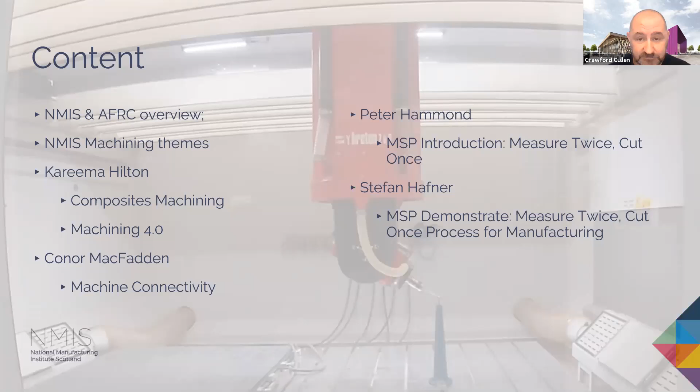So the content today: I'll give a brief overview of NMIS and AFRC, and then the two NMIS employees will talk about the machining themes currently being developed at NMIS. Kareema will talk about composite machining and machining 4.0, and Conor will talk about machine connectivity. Peter Hammond will then do an MSP introduction, and this chat will be about measure twice, cut once. Then Stefan will do a demonstration of MSP and the software available. This is software that's widely used at NMIS.

So what is the National Manufacturing Institute Scotland? The National Manufacturing Institute is a group of industry-led manufacturing, research and development facilities where research, industry and the public sector work together to transform skills, productivity and innovation, to attract investment and make Scotland a global leader.

NMIS will increase productivity by reducing barriers to innovation, stimulate investment and increase manufacturing competitiveness, catalyse job creation and strengthen supply chain links, and inspire and attract talent, equipping current and future workforces with the skills they and businesses need. They'll work with manufacturing businesses of all sizes in multiple sectors, providing benefits across the whole of Scotland.

So NMIS is operated by the University of Strathclyde, but supported by the Scottish Government, Scottish Enterprise, Highlands and Islands Enterprise, Catapult UK, Skills Development Scotland, Renfrewshire Council and Scottish Funding Council. The NMIS Group, as you know, AFRC and LMC are already well-established centres.

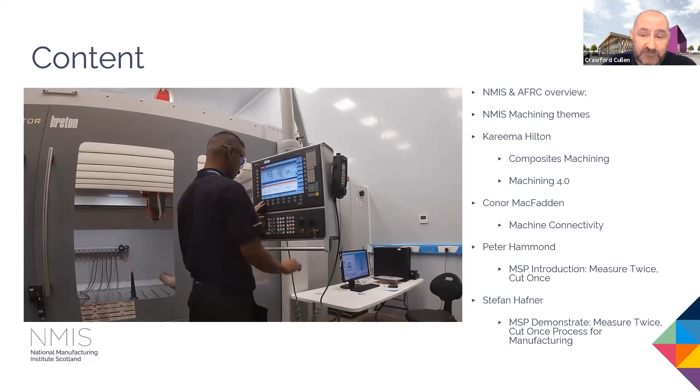Then with a high value component such as a casting or a forging, maybe with a lead time of 12 to 14 months, MSP then tells us: can we make that part from that forging or that billet that is supplied? Once this has been done, MSP can then carry on and continue to inspect the part. Does the part conform, or do we need to change or alter the program?

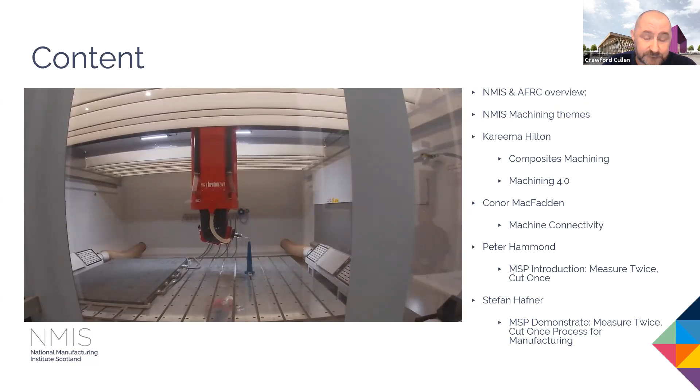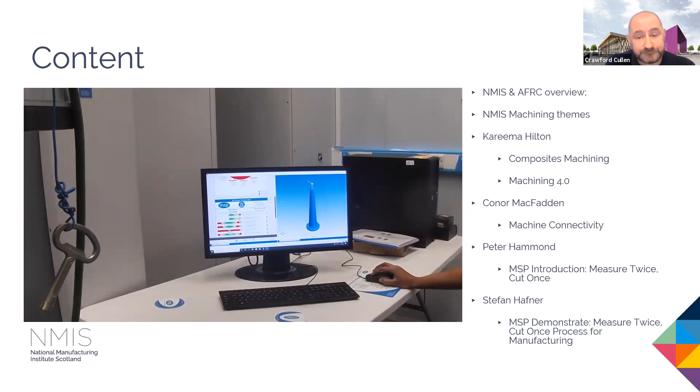So I felt that was the best place to start with a machining webinar. Hopefully these will continue and we'll touch on other subjects that may be important to you in your process or in your manufacturing. With that, I'd like to pass you on to Kareema Hilton. Thank you.

Thanks for that, Crawford. Okay, so I'm Kareema Hilton. I'm a manufacturing engineer at the NMIS team, and I am leading the Machining 4.0 project.

If you haven't heard of it, it's a European funded project and it's aimed to help SMEs around Northwest Europe. So we are aiming to transfer knowledge on innovative technologies to SMEs to make them more competitive with the rest of the world.

The project itself consists of 10 partners, and these partners are located in Germany, Switzerland, France, Belgium, Netherlands, Ireland, and ourselves in Scotland. So we're covering quite a lot of the Northwest Europe region. The aim of this is really to capture a lot of the small to medium-sized enterprises around these regions and try to make them more innovative.

There are three main deliverables of this project. One of them is to create technology sheets. So these are one-pagers that we have on the Machining 4.0 website. There's a link following in the next couple of slides that you can go to. These technology sheets are coming from all 10 partners, and it tells you about different technologies that these partners are experts in. Please feel free to have a look at these sheets.

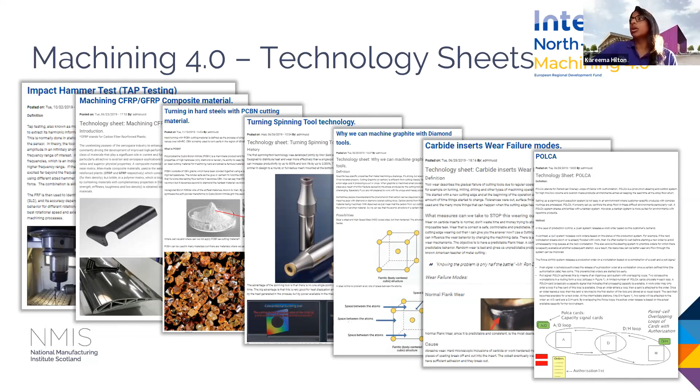Another deliverable of the project is the voucher system. So we have 50 vouchers that we can basically help 50 SMEs around the Northwest region. The value of the voucher is 12,000 euros of our time. So it's basically passing on our expertise, allowing SMEs to use our equipment and our technology areas, really just to show the SMEs the technologies that are out there and to prove to them that they're actually worthwhile, but without them having to spend money on it at this stage, they can test it out.

So to go about a voucher, I would say to get in touch with myself or any of the other partners, and we can discuss how we can go forward. And if we end up realizing that there's a means for the voucher, then please go onto the website and you can fill out a form.

The main criteria are you have to be an SME within the Northwest region. It would be great if you're willing to share about the project that we will work on together. We could share it to other organizations and put it on the website. And the content of the voucher should be in the field of machining or Industry 4.0. So we do request that the organizations are machining SMEs.

And the third deliverable of the project is application demonstrators. So all the partners have different demonstrator application areas. The AFRC ourselves, our demonstrator is on machining stresses. So this is an area that we've done a lot of research and development in the past few years at the AFRC NMIS team. We have different equipment. So we've got a DMU 125, which is where we are going to show off our demonstrator in this case. But in the team, we have a lot more other machines on site.

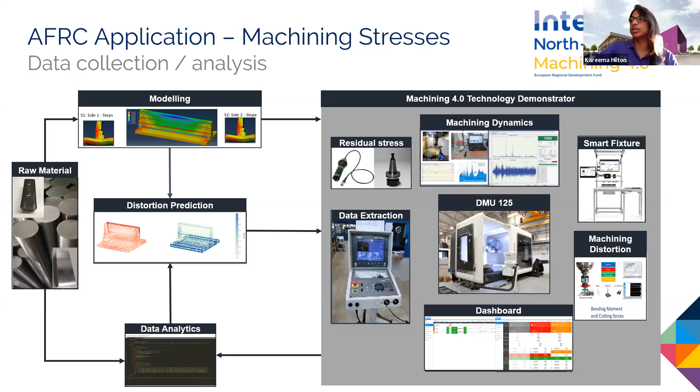We're proposing to use our tap test kit, use a smart fixture, use a sensory tool holder. And all these areas, we're hoping to extract data from these technologies and display them on a dashboard, which my colleague Conor will talk a bit more about later on. And we will extract data from these technology areas and try to analyze it and help the machining SMEs to understand what's happening when they're cutting parts in the future. If you have any more questions about this, please ask at the end in the question and answer, because I'm more than happy to supply information.

Another area of our application is composites machining. So we recently brought in a Breton Raptor. It's dedicated to machining lightweight parts. We've installed our MSP software on it, which Stefan and Peter are going to talk about further. This is allowing the machine tool to be able to locate datums on complex parts a lot easier than traditional methods. And this will help us to machine lightweight parts as close to drawing as possible. So the Breton Raptor is a 5-axis high-speed milling machine. So it's good for machining composites parts, but also aluminium parts as well.

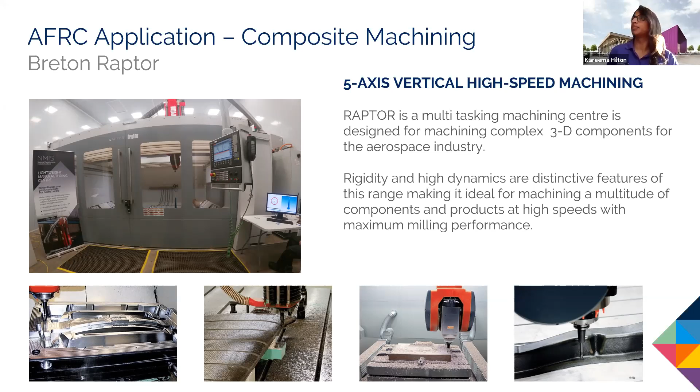So now I'm going to pass you on to my colleague, Conor, who's going to talk more about connectivity and dashboards. Thank you. Thanks, Kareema. So I'm going to talk to you today a little bit about machine connectivity. Can you click onto the first slide?

Thanks. So if you've heard about machine connectivity, you've probably heard of things like the industrial Internet of Things or big data or machine learning. Maybe you've even gotten to the point of some of the communication standards like OPC UA and UMATI and Modbus. But for those of us that aren't computing science engineers or don't have a computing science degree, what does this actually mean? It wouldn't really be fair to call these buzzwords because they do all mean something, although they can feel like that in some senses.

So if you're just getting started with machine connectivity, it can all be really quite overwhelming. If you're looking for a complete smart factory setup, you do need to know what these things are. So I would recommend that you speak to our digital team who are doing some really good work in this area. But if you just want a bit more of a simple quick start overview, that's what I'm going to talk about now. So talking about if you're a smaller machine shop, how you would get started on machine data.

So the first question you always have to ask when you're starting to collect information is, what are you actually trying to achieve with your information? So based on that, we've come up with the following quite simple use cases. The first one is productivity monitoring. So if you're a production manager and you want to understand what your OEE is on your machines. The second level is for an operator that maybe has to run several machines at once. You don't have time to stand by each individual machine while you're running the program. So you need a quick view of what's happening on each one that you can quickly check on.

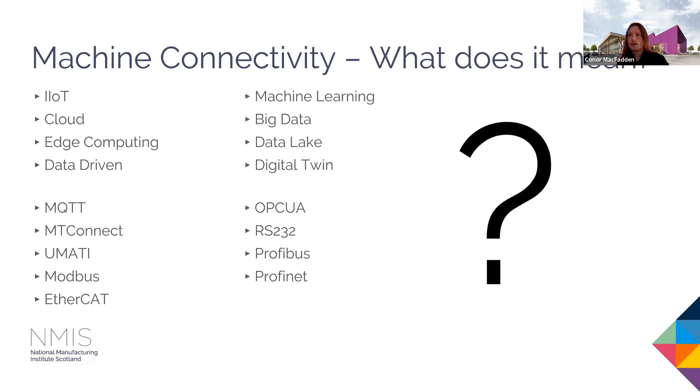And the third one is from a maintenance point of view. Maybe your maintenance department is quite far away and you want to see what that error is before you walk up to the machine. So what data do we actually need to do this? So the first thing that we need is machine availability. That's just, is the machine on or off? The next one is the operation mode. So is it in automatic mode, MDI, edit mode?

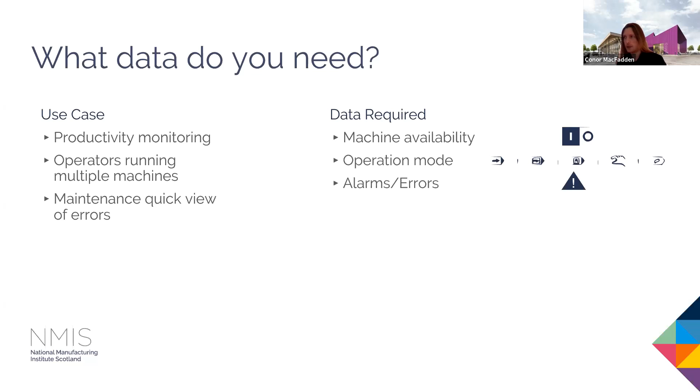What can also be helpful is the alarms and errors. So that's where your maintenance department might be able to see that before they walk out to the machine, or you might just want to keep a record of that for your own information, because you might anecdotally know that a machine always has the same fault, but you don't keep a record of it. So that's helpful to know. And the final thing that can be helpful is just the current program if you want to see what's happening and correlate that back to a part number.

So what does that view actually give us? If we have that information, we can get a quick view of what is happening on each of our machines on the shop floor. So now we know what we want. How do we actually get that, and how do we present it?

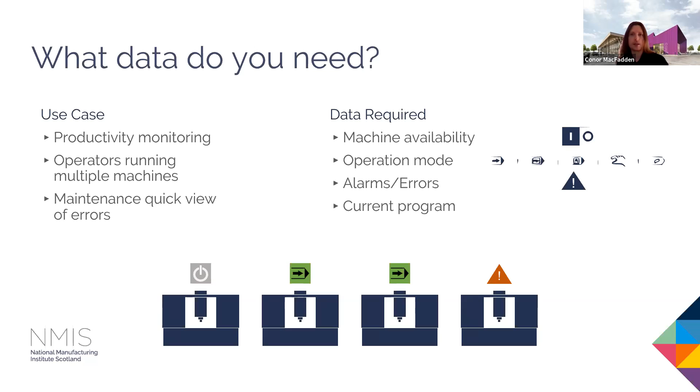So there's a couple of options when you're starting out. You can go the DIY route, and there are some benefits to the DIY route. We've got open source software available, so there's no investment required up front. And if you do it yourself, you will learn how the systems work, and you will get a really good understanding of your systems and what is and isn't possible. And you can develop all that to your own specific needs. The difficulty you will have with that is the stuff that is open source is quite limited in terms of its compatibility and what machines you can connect to. You might have to develop a lot of that yourself.

You will have to have some programming knowledge and network knowledge. So not to the full extent of being a computing science engineer, but you need to be able to work around the basics. And you might have some limited capability. So even if you can connect to your machine, you might not be able to do everything you need to with that.

The other option is the commercial route. So there are several companies around who will be able to provide you with a commercial integrated package for connecting your machine tools. In fact, some of our members at the AFRC offer some of these packages, and they may be in chat, so you can possibly speak to some of them about their offerings.

But you will get more comprehensive integration. They work with all sorts of different machine tools, so you'll actually be able to talk to your machine. They will have fully supported applications, so you don't have to go developing it yourself. And they have quite extensive features, so stuff you might not have even realized you wanted, they will offer to you as standard.

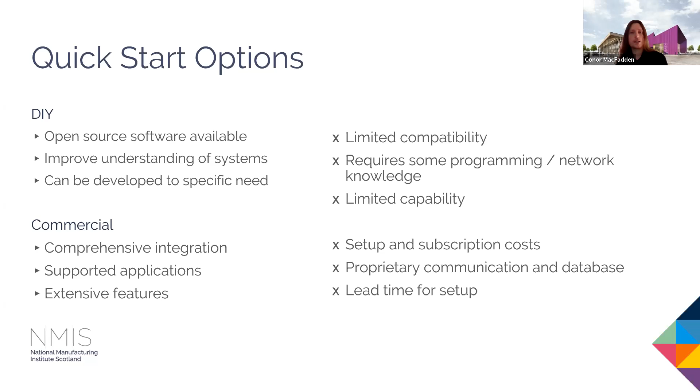So what did we actually do? We had a look around to see what standards were available and what we could do ourselves. We found MTConnect, which is quite a well-developed standard. It's royalty free, so you can do what you want with it. And they have a lot of resources on their own GitHub page where you can just download existing adapters and agents. I won't go into the detail of how it all works, but we have 5 machines that we normally work with, and we wanted to see if we could get these connected.

So the first machine that we have, the most simple one, was our twin turret lathe, which is a DMG Mori NLX2500. So it's got MTConnect built in. So all we had to do was point our system at that, and we were getting data straight out. That was nice and easy.

We have 2 machines that have FANUC control. FANUC have the FOCAS protocol, which is built into the vast majority of FANUC machines. I haven't encountered a FANUC machine yet that doesn't have it. There is on the MTConnect GitHub an open source adapter for the FOCAS system. So we were able to compile that, point it at the machines, and get data out.

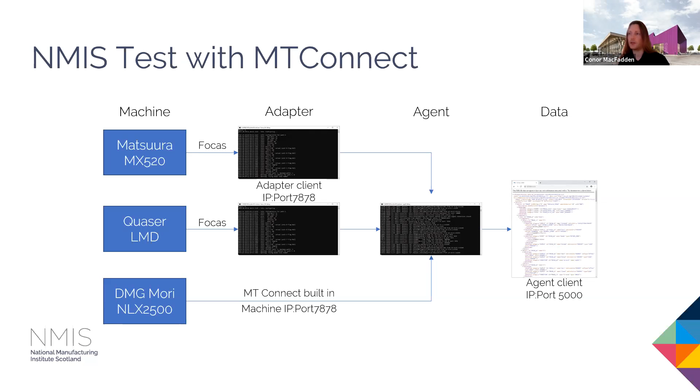The other 2 machines that we were hoping to connect, we had a bit more difficulty with. They use Siemens 840D controls. And if you have the OPC UA license, you will be able to get an MTConnect adapter for it, but we don't have that license. So unfortunately, we haven't been able to connect those machines. But from a quick trial point of view, we have, within the space of a few days, managed to get 3 of our machines on the system.

And really, the data is available just by dialing into the IP address, so you can write your own applications. You can create an MQTT application using Node-RED and read information from it. You can do what you want. So this is really just a quick start to give you a flavor. And hopefully that's demystified a little bit around the questions that you might have on machine connectivity.

So I'm Stefan. I'm an applications engineer at MSP, and I've been doing that for about the last 6 years now. My role covers a wide range of areas, both on the customer-facing front and on our product development side. I'm often found supporting customers in both part and process development, as well as helping them understand their machine performance using the NC Checker benchmark.

Alongside my customer support role, I spend a lot of time developing the on-machine side of NC Perfect Part, on the macro development, and testing that both on simulators in the office and on live machines.

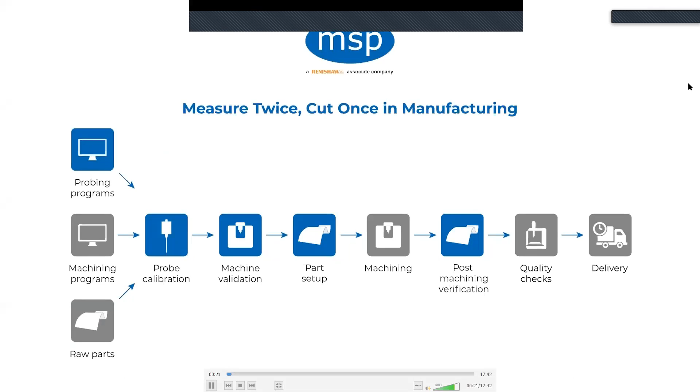To get started, I'll begin by explaining how our Perfect Part solution fits into the machining process. Like Pete says, we help stop companies from machining parts incorrectly and incurring huge costs through scrap parts or rework. We review a customer's whole process and work with them to eliminate errors from each stage, from CAD design all the way to inspection at the end of the process. Throughout my time at MSP, I've worked closely with NMIS on a range of projects and have seen firsthand how our products have benefited them.

Today we will show the full Perfect Part process. This begins in the CAD office with creating the part programs. We then move to the shop floor. First we need to make sure the machine is capable. We do this using NC Checker.

This uses a completely independent calibration and verifies the machine is in good condition. Once we are confident the machine can produce the part, we then move on to the part setup. Using NC part locator alignments, the part setup process is hugely simplified, and the part alignment and condition of supply is verified before any machining takes place. After the part is machined, we then check the part before removing it from the fixture to ensure it is correct before it leaves the machine.

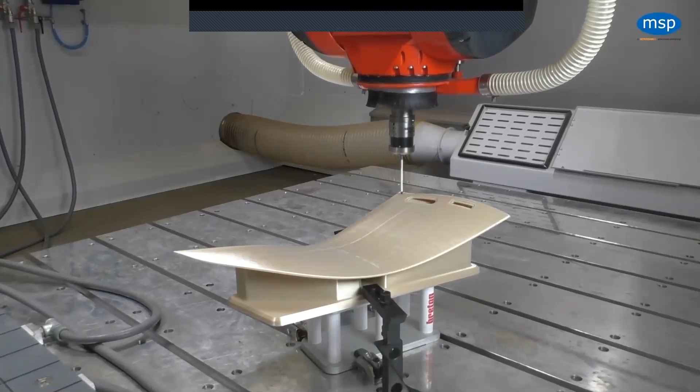Today, we're looking at a composite winglet, which commonly faces many of the problems that our products solve, and is a type of part that we're often involved with.

It has all the usual challenges faced on a near-net part, including difficulty fixturing due to springback when it's released from the mould, and deformation when cooling. Critical features are not in the correct place for machining. Minimal excess material leaves no room for error.

And counterbores that are difficult to machine to the correct depth due to the previously mentioned deformation. Manual setup methods can't account for these issues, or are extremely time-consuming, and usually result in a failed final inspection, leading to large amounts of rework, concessions, or even scrap.

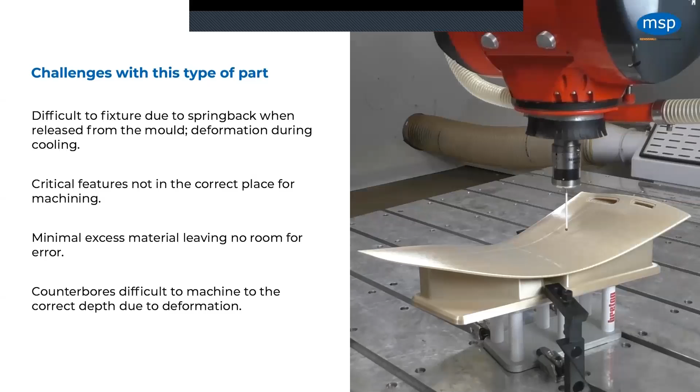And this is where NC Checker and NC Part Locator comes in. It can correct for these problems before a cutter ever gets loaded into the spindle.

The process starts in the CAM office, where the probing programs are created. These are created offline in the same CAD-CAM system as the machining programs, and are delivered to the machine in exactly the same way as your machining programs. These are all created beforehand, so there's no CAD on the shop floor, and the program control is retained by engineering. In this case, we're using CATIA to create our probing programs.

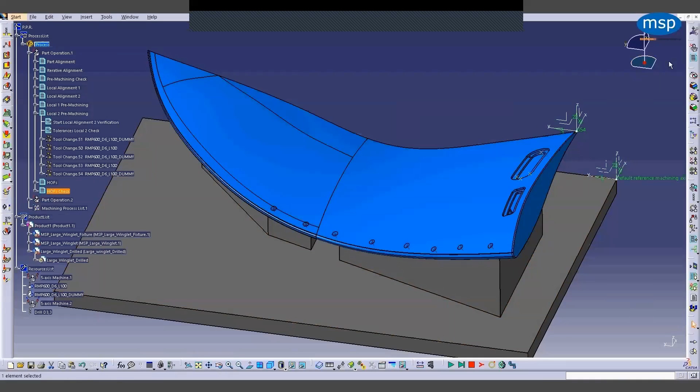In conjunction with CATIA, we're using our NC Inspect plugin. This allows us to add in all required NC Part Locator functionality without resorting to custom user commands or PP words, a struggle I'm sure many of you are aware of.

By using NC Inspect in conjunction with CATIA, we have the benefit of the toolpath generation that we're familiar with, and have full use of all NC Part Locator functionality and are not restricted by the post.

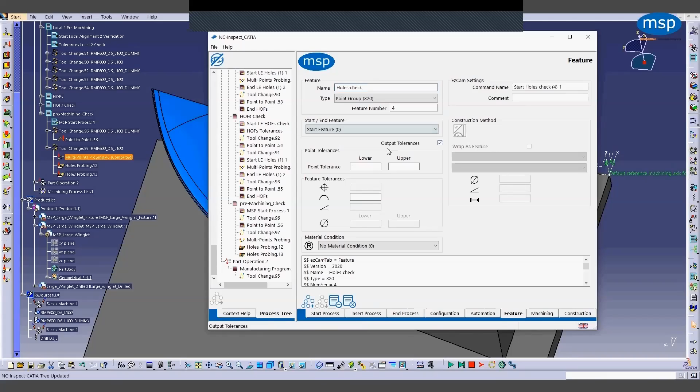All of the information required to generate a full NC Part Locator report is contained in the probing program itself, including all tolerances and any process control variables.

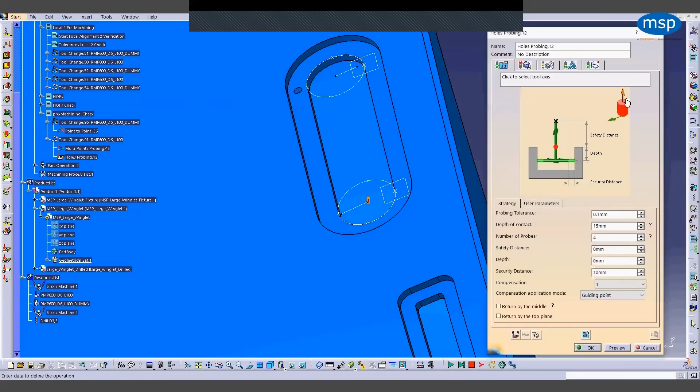The programs can be created in any CAD-CAM system of your choice as long as it supports the generation of probing programs. Depending on the part issues, a program can be quite simple or quite complex. Multiple alignments can be generated, and offsets for counterbores or tight tolerances can be probed.

So once we've created the probing programs, we can look at what happens on the machine, starting with NC Checker. NC Checker assesses the performance of the machine tool to check it is capable of machining parts within tolerance. This is particularly important on 5-axis machines, where any machine errors, in particular in the rotary axes, will have a major impact on the machine's ability to machine the part within tolerance.

To eliminate any sources of error in the probing results, this uses an independent probe calibration as part of the NC Checker process. This means that NC Checker results are not prone to any errors due to probe data faults that may result in invalid probing results. This calibration is used for both NC Checker and NC Part Locator, so we are certain the probing results are correct.

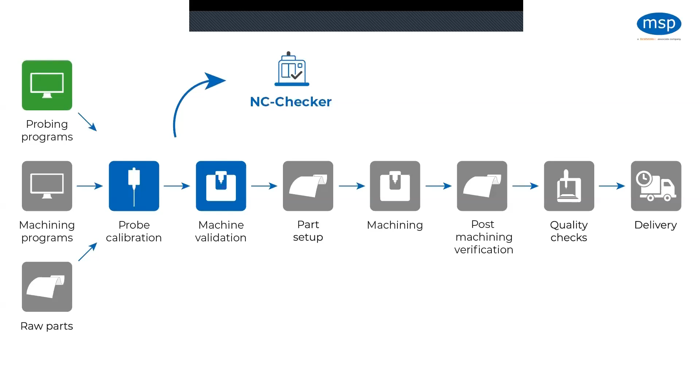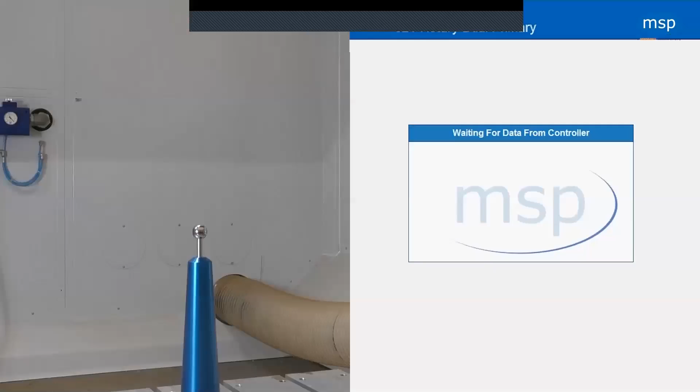The benchmark program is run on the machine. This is supplied as part of the delivery by MSP during the install. The benchmark consists of a series of checks that verify both the performance and repeatability of the probe, the reproducibility of the tool change, and the performance of the rotary axes.

The rotary axes are assessed by measuring the sphere at multiple head orientations. Unlike other systems, NC Checker drives the machine exactly the same as in a machining program, for example using G43.4 or G43.5, or TRAORI. This means the checks correlate exactly to any errors you would see in a finished part.

The results are displayed in the Perfect Part software, and the whole process is automated and can be run in about 25 minutes.

The tests are designed to assess the machine kinematics over a full range of movement. The main test assesses the rotary axes on their own, as well as indicating where the machine is capable of producing parts within tolerance. The reports can be used to diagnose the type of error, and with a small amount of analysis can suggest parameter updates if these are applicable.

Additional tests also assess the rotary axes over the full range of movement to give an image of the machine's capability over the full working envelope.

After the programs are run, the benchmark is generated. The main benchmark report makes it easy for everyone to see the machine's capability at a glance by the colour of the wheel. This colour changes, going from green when within tolerance, to orange when starting to drift towards the upper tolerances, and finally red if the benchmark has failed.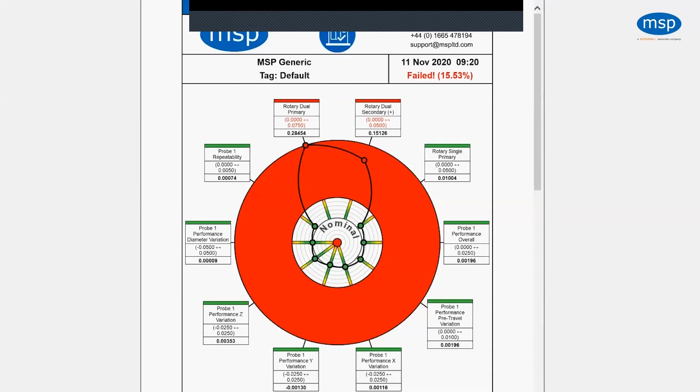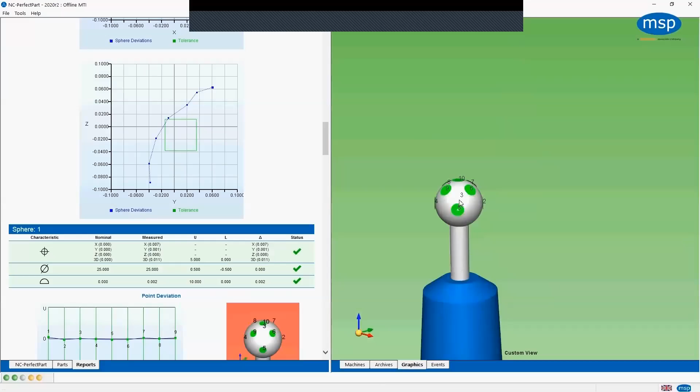By reviewing the rotary axis checks, we were able to find the source of the error and correct the machine kinematics in the space of about an hour and a half. In this case, the error was down to an incorrect probe calibration when the machine was set up. Because we use a completely independent calibration for NC Checker, we found this error pretty easily.

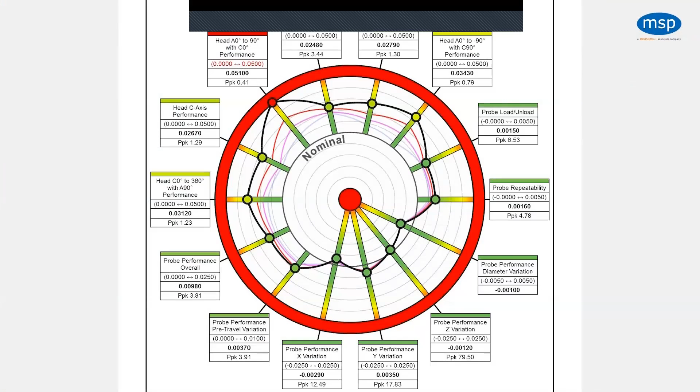It's also possible to track these reports to monitor the performance of the machine over time. This makes it very easy to see if there's any change in performance and allows planning of preventative maintenance rather than reactive maintenance, with its associated machine downtime and loss of revenue.

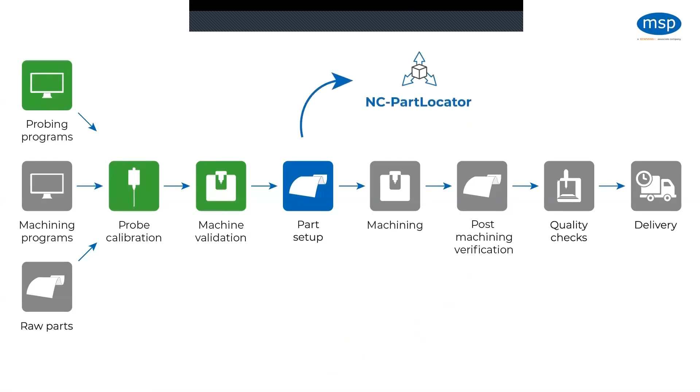Now we are confident our machine is capable of producing the part within tolerance, we can move on and look at the part setup itself. As mentioned before, a part like this will have some distortion, meaning complex fixtures and multiple ops are normally required. NC Part Locator automates the setup process and has allowed us to simplify the fixture and allow access to all features in a single op.

Here we've used a simulated vac fixture and we've simply placed the part on the fixture, set the datum by eye to within about a millimetre or two. NC Part Locator will easily correct for setup errors in the millimetre range, and if programmed correctly, can even correct for larger errors than that.

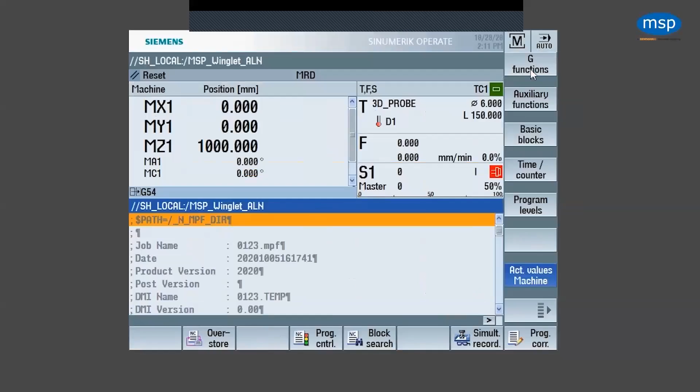The programs we created previously are run on the machine. Because all the process control and process tolerances have been defined in the program, the operators simply have to run the program the same as in any other machining. NC Part Locator automatically detects the type of process being run. The part is probed and the data is transferred to the NC-PerfectPart software.

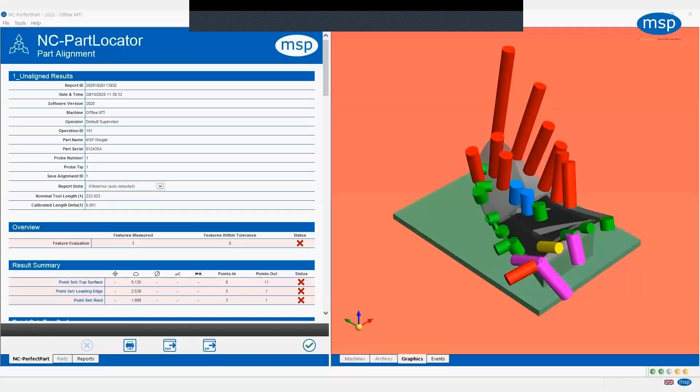Once the probing is complete, the software produces a series of reports, which we'll go through now. The initial report displays the measured data in its unaligned state. Whiskers on the model indicate the magnitude and direction of any deviation from nominal. This shows that if the part were machined with no alignment applied, the finished part would be incorrect.

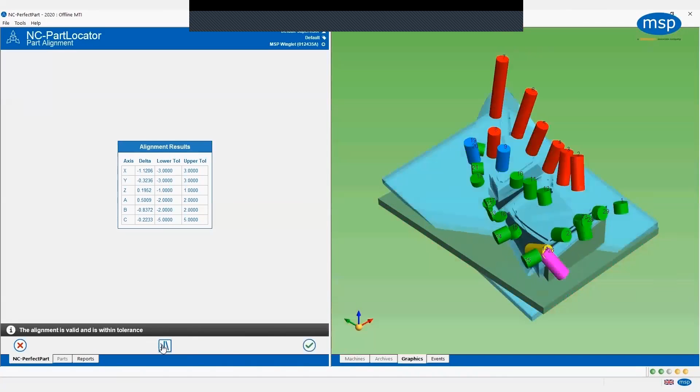Proceeding on from the measured results, NC Part Locator calculates the best fit alignment. This is a full 6-axis alignment. We can align and unalign the views to see the translation that will be applied. Obviously this is exaggerated to make it clearer. We can also see the calculated XYZ shifts and the ABC rotations in the table.

The final report shows predicted results using the measured data but with the alignment applied. This report uses the measured data, so as well as showing the predicted alignment results, it's also a good condition of supply check, and any out-of-spec parts can be rejected before machining. Not only is NC Part Locator helping you make a good part, it's also stopping you make a bad one.

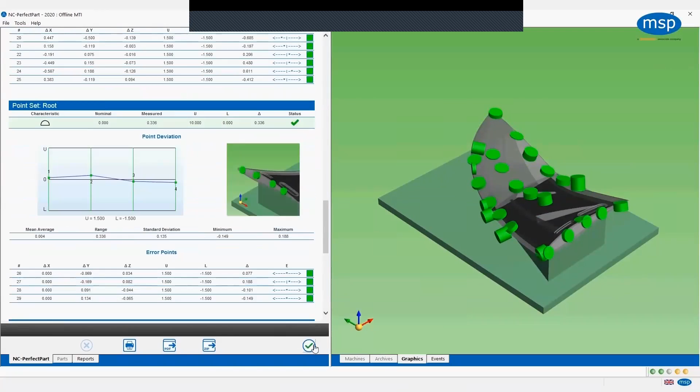Proceeding on from the aligned report, the alignment data is transferred to the control, ready for use in subsequent machining or for other probing operations. Once the initial alignment has been generated, there are a range of subsequent NC Part Locator processes we can use.

Because probing a free-form part will inevitably contain some cosine errors, an iterative alignment can be run to further refine the alignment. For parts where local features are critical, we can also create multiple alignments that are only applicable to that feature, for example an access panel in a wing skin, or a PCD in a forging.

We'll usually run a pre-machining check after an alignment has been generated, and before we do any machining, to verify that the alignment is valid. This normally includes the points used for the alignment, but additional points can be added to create a more complete condition of supply check. Should this process fail due to points or features being out of tolerance, it will stop the program and prevent it carrying on.

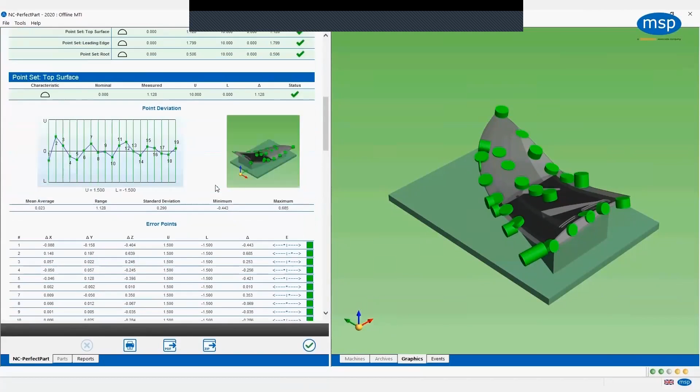With multiple customers who've removed this after a number of parts, as they're 100% confident the alignment is correct, time can be saved. The pre-machining process can also be used to perform in-process inspection and to allow cut, measure, cut type of operations.

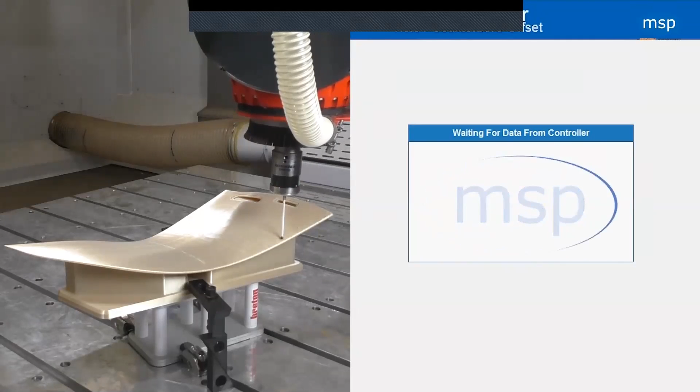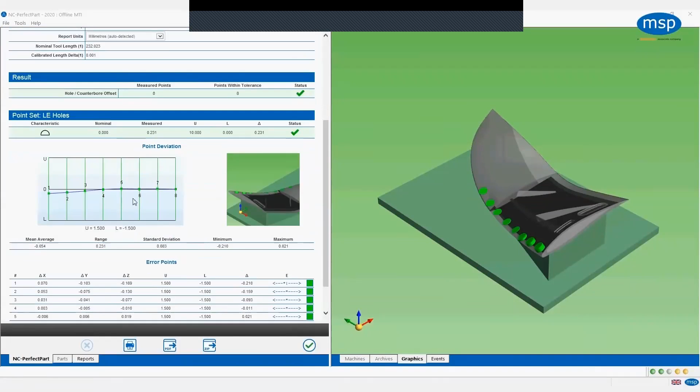On composite parts, there's often a requirement for countersinks to a specified depth. Due to the nature of composite parts, maintaining the correct depth for every countersink can pose a lot of challenges. The hole offset process probes the part before the holes have been drilled and records the deviation from nominal. When probing is complete, NC Part Locator generates a report showing these deviations. Tolerances can be used here to apply process control and make sure there's sufficient material.

Once the probing is completed, the offsets are stored on the PC. These will then be recalled during the countersinking operation later in the process and apply a length correction to the tool, ensuring a perfect countersink every time.

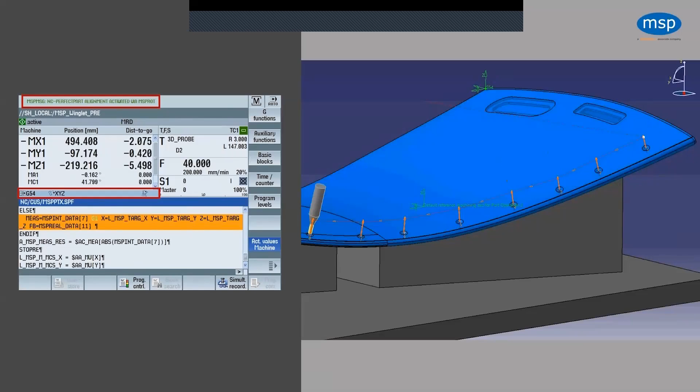Once all the required alignments and offsets have been generated, we can machine the part. Because all the data is stored in the NC-PerfectPart software, it can be recalled at the required point in the machining process. All probing can be completed before the machining, meaning there's no risk of swarf affecting the measurements.

The part is then machined using the alignment. This is applied using a coordinate system translation and rotation that is applied via a subprogram call in the machining tapes. This is applied in all machining operations, from roughing through to finishing and drilling.

During the countersinking operations, the offsets that we probed previously are recalled and activated before the countersink is cut. These are used on top of any alignments.

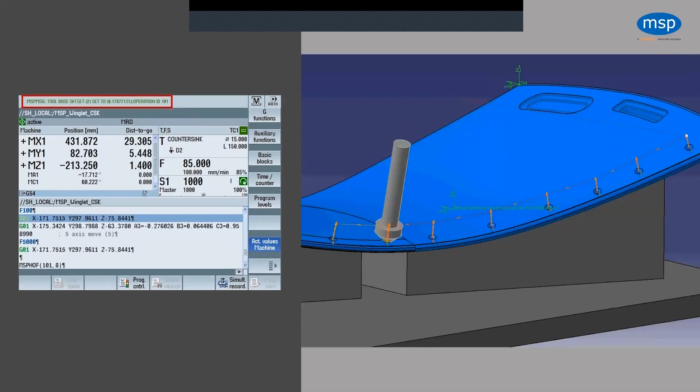After the part has been machined, a post-machining verification can be run to verify the part has been machined correctly. This probes the part using the alignment before removing it from the fixture, and lets us verify the machined features are all correct. By probing the part on the machine, we verify the machining was correct before it was released from the fixture, and check whether any springback from stress relief during machining has caused the part to deform any more.

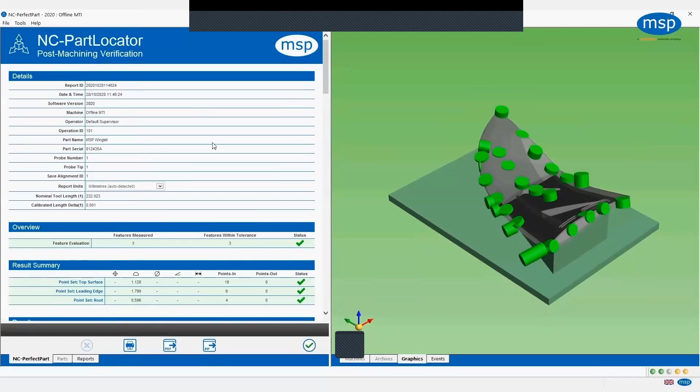It's also very useful for finding sources of error in any parts when errors are found in final inspection. By probing the part while it's still on the machine, we can also find problems immediately and not a couple of days later when the part's inspected at CMM, by which time many more parts may have been run, potentially scrapping a number of parts and costing thousands.

Some of our customers have hugely reduced or even completely eliminated the requirement for CMM checks by using NC Part Locator in their process.

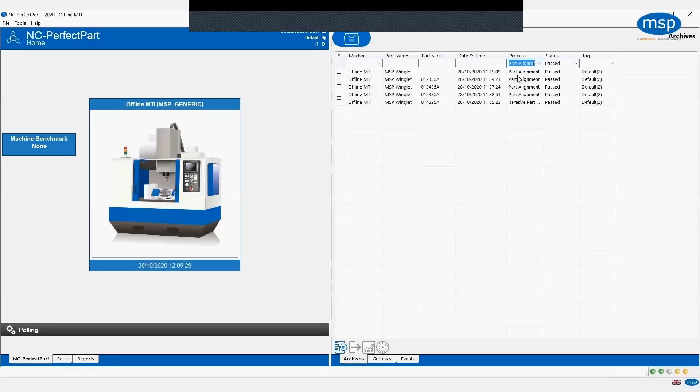Our NC-PerfectPart software stores all reports, both from NC Checker and NC Part Locator, in the archive. This maintains full traceability throughout the process. We can search and view all of the reports via the archive viewer, and the reports can be exported for sharing with other parties.

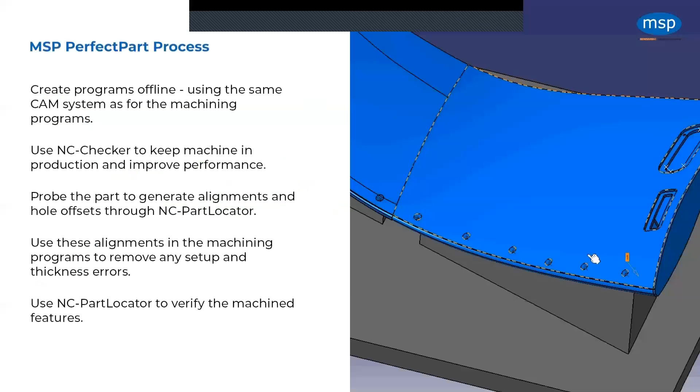And so we've come to the end of the machining process using our Perfect Part solution. We've seen how the programs are created offline using the same CAM system as the machining programs. After this, we've made sure our machine is capable of producing the parts within tolerance, and if required, have been able to use the NC Checker benchmark report to improve the machine performance.

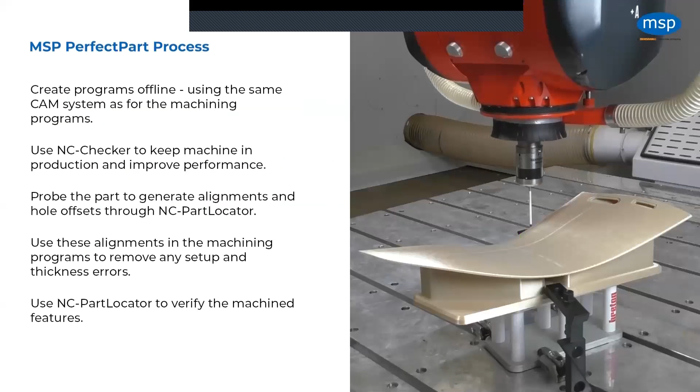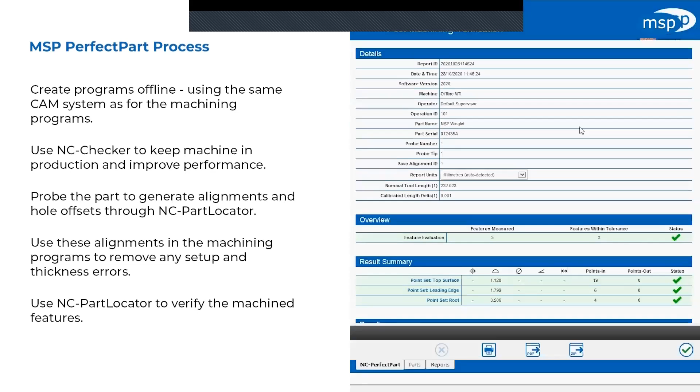We've then probed the part and generated an alignment or multiple alignments and hole offsets. The alignments and hole offsets have been used in machining programs to machine the part with any setup errors and thickness errors on the counterbores removed. Finally, we've verified the machined features on the machine.

And that's all there is to it. By removing and checking for error at these stages, you can have full confidence that your machining process is extremely precise and will be producing good parts.

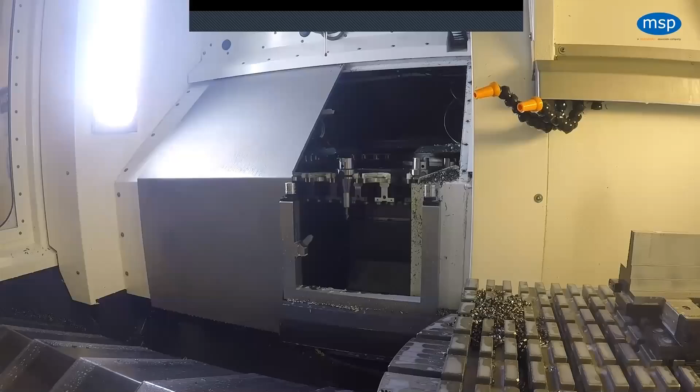Like I said at the start of the demo, these products have helped NMIS to monitor the machine performance over time and understand how the machines are changing. It has also given them the ability to reduce setup time and use simplified fixturing to hold complex parts. We can also carry out in-process measurements of test cuts.

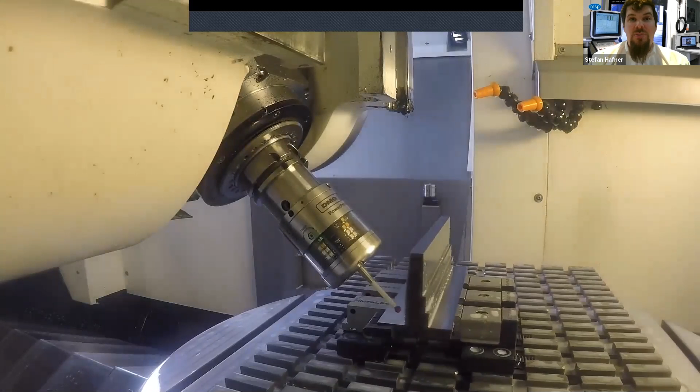So I hope this has been interesting for everyone. We've looked at a solution for a typical composite part here and seen how some of the NC Perfect Part processes are used and applied to dealing with issues. While we've shown a composite part here, the same principles can be applied to any other type of part really, in particular near-net parts such as castings or forgings, and this is where we've helped a lot of our customers, including hot forged, cold forged, castings, and additive parts, additive in particular.